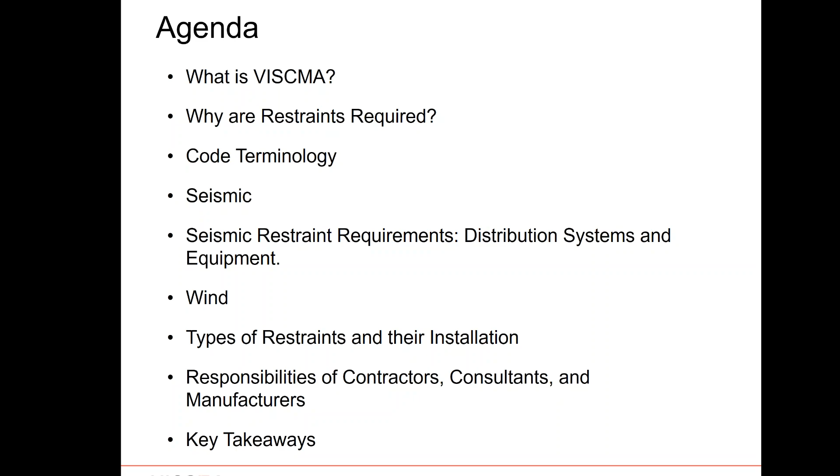We'll talk a little bit about wind, which is one of the forgotten areas where restraints are frequently required. And then we'll look at the type of restraints that are available and their proper installation. Finally, our audience are contractors, consultants, manufacturers, and code officials. So we'll talk a little bit about the different responsibilities of each and end with some key takeaways. What are the important things to remember after the fact?

So VISCMA is a collection of partners and companies to form the Vibration Isolation and Seismic Control Manufacturers Association. We were incorporated in 1999. And we're experts in the field of seismic restraint, wind restraint, vibration isolation, and noise isolation.

Our purpose is to work together as a collective of professionals with a lot of knowledge and a lot of experience and expertise to be able to provide resources, interpretations, and standards, as well as best practices for the design professionals, installing contractors, and code officials in our industry, to be able to maneuver through the different documents that are necessary to understand what needs to be done for a building when it comes to vibration isolation and seismic restraints.

So to kick off our agenda today, we'll take a look at when are these restraints required. We've had a lot of communication with contractors, code officials, and specifying engineers to say, okay, I have a building, sometimes it requires seismic, sometimes it doesn't. Just to start off, we need to be speaking the same language. What are we talking about?

When we talk about restraint, we're talking about the restraints of non-structural components. In our industry, generally, these are mechanical and electrical equipment and distribution systems, usually within the HVAC world. And what we're trying to do is restrain them against forces caused by extreme events, not just earthquakes, but also winds, bomb blasts, and different things that can happen to want to move these pieces of equipment.

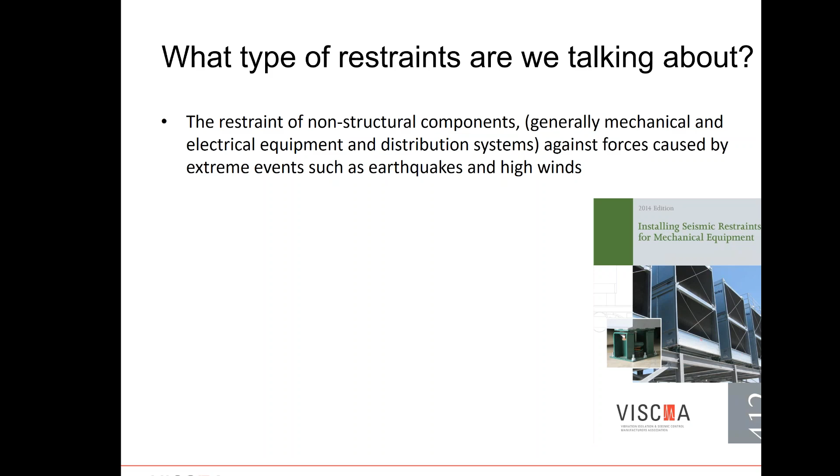The main purpose that we do this is for life safety. In different buildings, you have these pieces of equipment, and you want to make sure that they're operable during and after an event for life safety purposes. You also don't want these heavy pieces of equipment or these heavy systems falling on people, creating bodily harm.

So we have a few different codes and references that we work with. The main is the International Building Code, also known as the IBC, which references the American Society of Civil Engineers, number 7, that is updated, and the number afterwards, 02, 05, 10, is the year that it is updated.

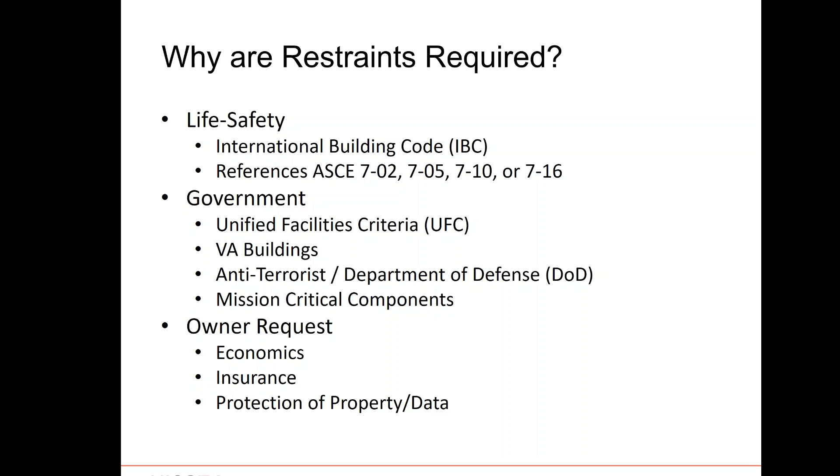You have government reasons, like the UFC, which is the Unified Facilities Criteria that's used for government buildings as well as military buildings, for mission-critical components, for anti-terrorism and Department of Defense. And then the last reason is due to the owner's request. Sometimes for insurance purposes, to be able to get a certain level of insurance, or to be able to protect very important data. A lot of restraints are put into data centers, for example.

Okay, let's talk a little bit about code references. So there's the code, there are standards, and then there are guidelines. An example of the code would be the International Building Code, or IBC. An example of a standard would be the American Society of Civil Engineers, or other standards that are available. And then guidelines or interpretations would be something similar to the VISCMA 412 manual that shows how to correctly install seismic restraints for mechanical components.

Translated, the IBC and the code really signifies the requirements. The standard tells you how to do it and provides you with the formulas necessary that you have to go through. And then these are always up to interpretation. And the guidelines serve as a good interpretation for the people that have to do the work on how it should be done.

A different slice or a different way to look at this is that there's a legal requirement and a non-legal requirement. The legal requirement is the code that becomes part of the building code, and then the standards that are also referenced by that code. The non-legal aspect are the standards that exist that are not referenced in the code itself, or the guidelines of the commentary that come with it. And again, an example for you to see would be the VISCMA 412 manual.

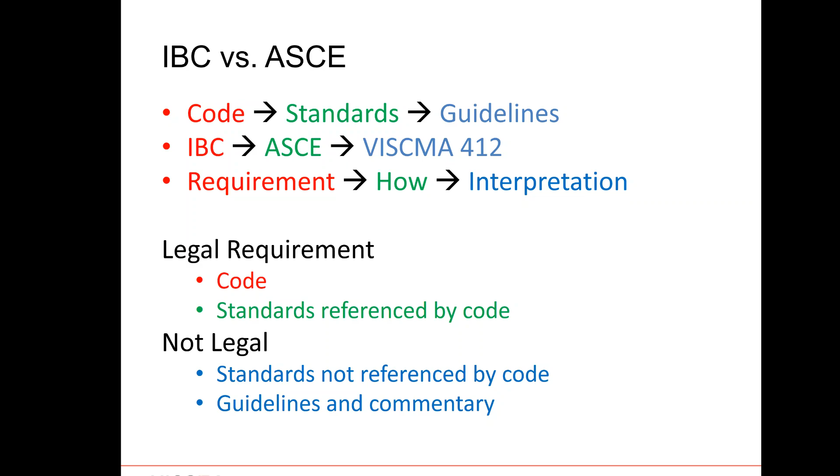Since 2003, the IBC has been referencing the ASCE, American Society of Civil Engineers, for the minimum design loads for seismic and wind. IBC is updated every 3 years. It was the amalgamation of different building codes from across the United States to create the International Building Code. And every 3 years it's updated. It's adopted by different municipalities and jurisdictions at different times. We still have people that are on IBC 2009, and we will have early adopters of IBC 2018 in early days of 2018. And there can be local amendments for each of these municipalities.

The ASCE document is updated as needed. It was updated in 2005, 2010, and 2016. And you can see that each IBC code references an ASCE 7. So in 2018, when your jurisdiction adopts that code, it will reference the newly updated ASCE 7-16. These are the critical documents necessary to have an understanding of what the requirements are for any new construction or retrofit construction in your area.

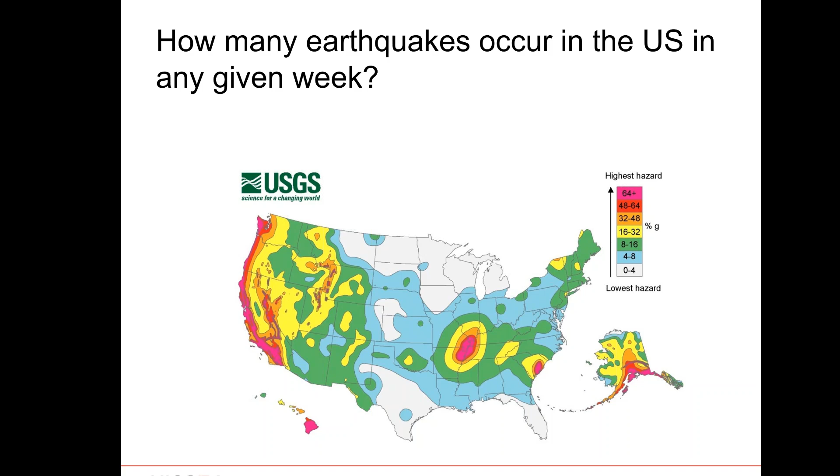Let's talk a little bit about seismic, and we'll start with a little bit of trivia. We've taken some information from the USGS website, and we've taken an average week. So if you were to think to yourself, how many earthquakes occur in the United States in any given week? I'll give you a little bit of time to think about this and come up with an answer. We ask this question when we do these presentations for different influencers. Usually the answer is 5 or 10, or maybe some people would guess that there's 20 or 30 in a given week. The answer for any average week is over 1,200 earthquakes.

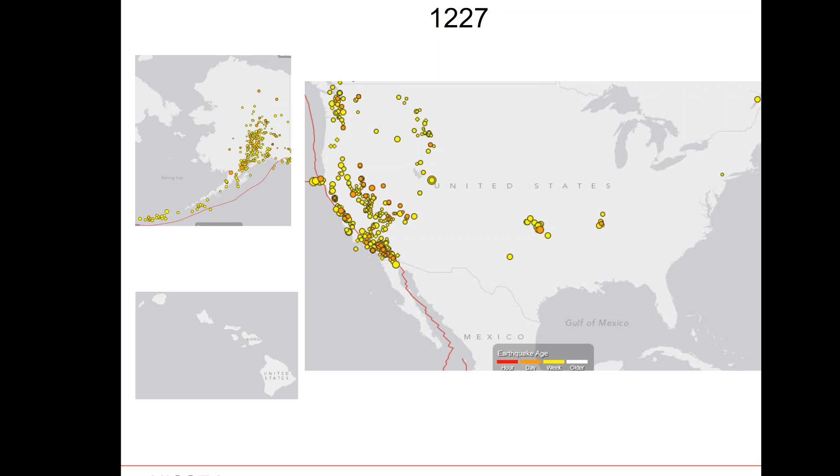And then you can see here on a map of the United States, there's a lot located in Alaska, California, up the West Coast, but it isn't only limited to those areas. You can see that in Montana and Idaho, Oklahoma, Tennessee, and usually in a given week, Hawaii, South and North Carolina would have some seismic activity as well. So this is not just something that applies only to the West Coast.

Obviously, you could see after an extreme event or during an extreme event, it's far more important for the structural integrity for both the building and the non-structural components for higher risk category buildings. This then determines a building importance factor, which is not to be mixed with a component importance factor that we'll speak about in a moment. The site class is a classification of what the building is being built on. What's it sitting on? Bedrock or a swamp? And the seismic forces will act differently on the building and its contents depending on that site class.

Then there are short period response accelerations or ground motions known as SDS and SD1, and these are determined by the location or zip code and are based on history and intensity. A structural engineer of record would take those 4 components plus other factors to determine the most important category that you need to remember from this webinar today, and that is the seismic design category. The seismic design category gives you a classification of a building and advises the consulting and design group of the needs and requirements necessary for restraints of non-structural components within that building.

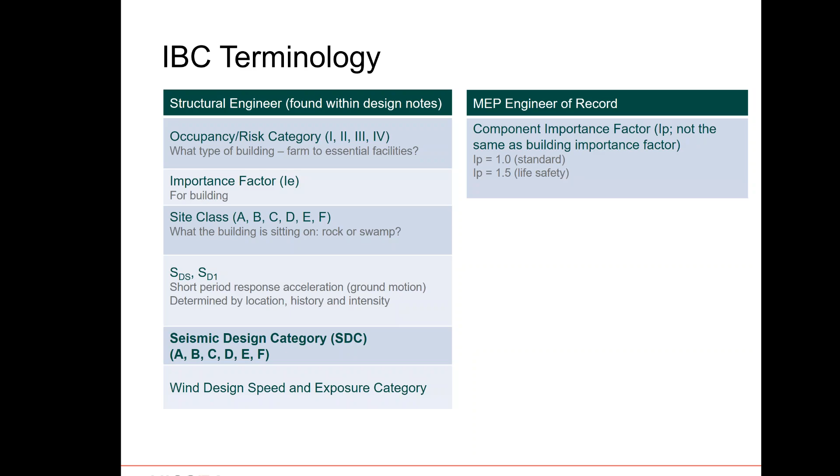It can only have 2 classifications, a 1.0, which is standard, or a 1.5, which is life safety or some other elements that we will cover in one of the coming slides. Basically, the component or system is important to the functioning of the building and life safety, or it's not. And this needs to be done on an individual system or equipment level and shouldn't just be a bland, broad brush across all systems within a building. By doing that, there might be overkill with regards to restraining things that don't need to be restrained.

So when we take a look at the seismic design category that goes from A to F, for buildings that are classified as A or B, there's no seismic design requirements for non-structural components. There are absolutely requirements for the building itself, but when it comes to restraining non-structural components, there's nothing that we need to be worried about. For buildings that have a seismic design category of C, only the systems with an I sub P of 1.5, which we will show you how to determine in a moment, require restraints. And then there are exceptions.

For buildings that are D, E, or F, usually you'll only see C or D. E or F are more of the extreme. But for buildings that are D, E, or F, all of the MEP systems, both 1.0 and 1.5, will require restraints. However, there are some exceptions and some exemptions from this that we will cover.

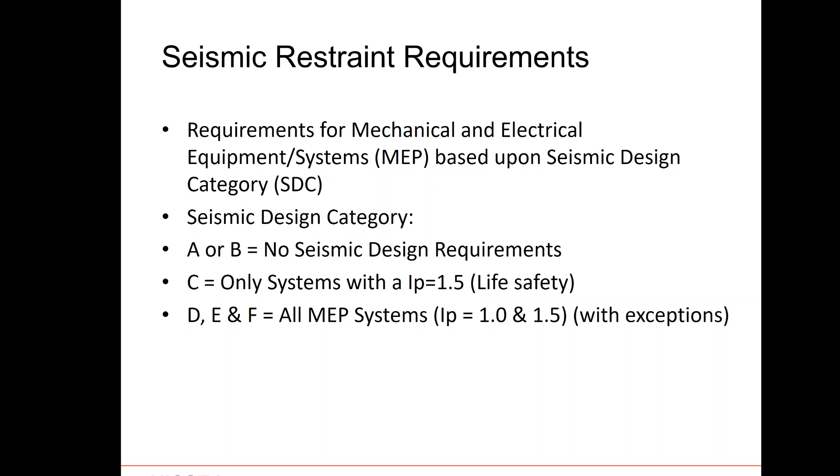Here, we've referenced the ASCE 7-10, since that's the most commonly used version of the ASCE currently, Chapter 13, Section 13.1.3, showing MEP engineers of record how to determine the component importance factor for different pieces of equipment and different systems. And here are the 4 categories that make the I sub P 1.5. By making the I sub P 1.5, there's more likelihood that that piece of equipment will need to be restrained.

So I'll cover a couple of these. The component is required to function for life safety purposes after an earthquake, including fire protection sprinkler systems and egress stairways. Or the component conveys, supports, or otherwise contains toxic or highly toxic or explosive substances. So you can get the picture, and if you reference the ASCE 7-10, Chapter 13, you will find these requirements of where you should classify a component as 1.5 versus 1.0.

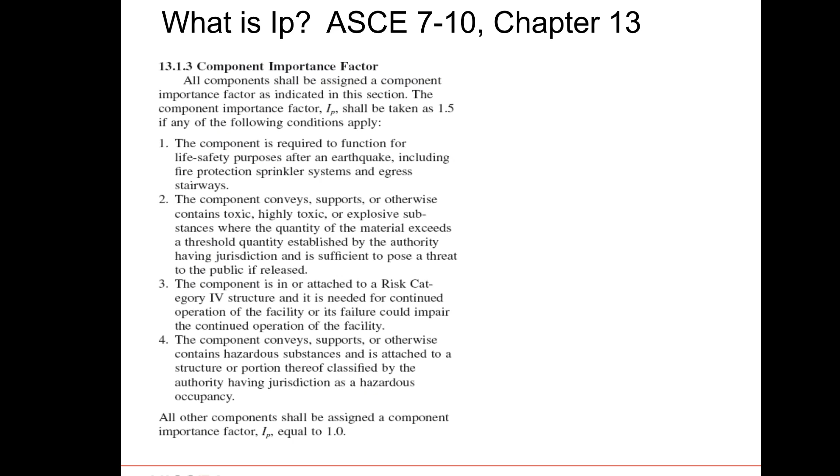Let's take a look at some of the restraint requirements for piping, duct, and equipment. Here you can see a few tables showing the exemptions and the requirements for different seismic design categories for different pipe diameters. You see the pipe diameters on the left going from less than 1 inch to greater than 4 inch. You can see for both 1.0 and 1.5 component importance factors for seismic design categories of A and B, the first column, that they're all exempt.

And then when you move to seismic design category C, you see that all 1.0 is exempt, and the requirement for 1.5 is anything that is 2.5 inches or larger. And now you can see why the role of the MEP is so important. If you classified everything as 1.5, then anything over 2.5 inches would need to be restrained. And you could have very varying scopes of supply for that building.

For SDCs of D, E, and F, you can see that there's still a requirement for 1.0, anything that's 3.5 inches or larger. I'd love for someone to show me some 3.5 inch pipe, never seen one. And then for anything that's 1.25 inches and larger, for 1.5, you'll have a requirement to restrain. Duct is a little more simple. You need to find the equivalent cross-sectional area being less than 6 square feet.

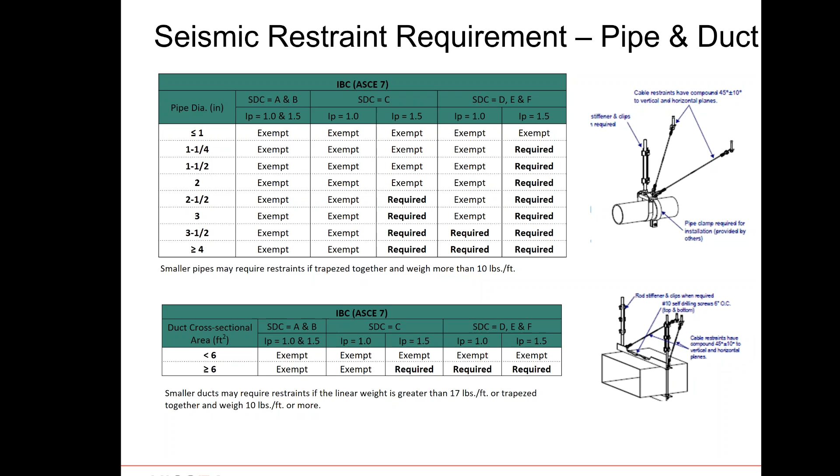Let's take a look at equipment. There's a few different exemptions based on weight for equipment. Basically anything under 20 pounds, which is not too much in the non-structural component world, then you're exempt. If it has less than 20 pounds, it's not considered to have life-threatening aspects. 75 pounds: if it's rigidly connected with no flex and has an operating weight of 75 pounds or less, and you see this with some VAV boxes, then there's an exemption.

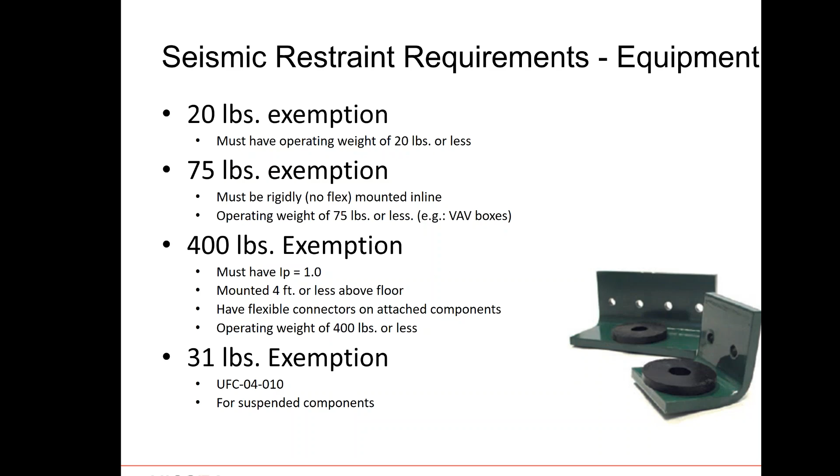And then usually for ground-mounted, floor-mounted equipment, there's a 400-pound rule, but it has a few different factors. This is only for Ips of 1.0. They have to be mounted 4 feet or less above the floor, so usually they're connected down to the ground. They have to have flex connectors on the attached components, and obviously have an operating weight of less than 400 pounds. Now, for a different code, the UFC, there's the 31-pound exception, which basically says anything that's under 31 pounds is exempt.

Coming to an end of my part of the presentation before I pass it off to John Giuliano, we'll quickly just take a look at a couple of types of restraints. We've spoken a lot about requirements, but we haven't taken a look at what these look like. So a restraint is anything that would restrict movement in a certain direction. That's the definition of what a restraint is. And these could be cable restraints that are usually used for distributed systems and suspended equipment, or rigid restraints, which would be brackets with a piece of strut or angle in between that would work as a two-way restraint for distributed systems and suspended equipment.

Steel-housed isolators, so an isolator like you see here in the middle that has a housing around it. The isolator allows small movement for vibration isolation, but under any event, the housing strength will kick in and basically stop the equipment from moving. Snubbers and brackets that maybe are put around a piece of an air handling unit or a piece of equipment to stop it from moving.

And then you have different types of structural stands for ductwork, piping, and tanks, as well as anchors that would just go through the feet of plate and frame heat exchangers, different bolts and screws. This final category has to be ICC approved. You can't simply take any anchor off the shelf and install it. It has to be an ICC approved anchor, bolt, or screw to be put in with the equipment and mounting holes.

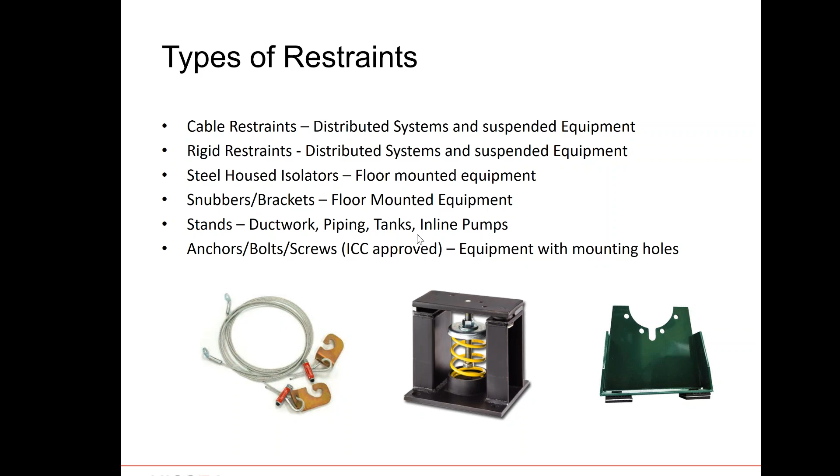So I'll just leave you with one thing with regards to the equipment and the product that you use. It must be included in the submittals and stamped by a professional engineer. For example, you can't just select something, put it on and say, okay, I put a snubber around this air handling unit. The design must be calculated so that an engineer of record can determine that the seismic restraint being used is sufficient to withstand the forces. Since the forces vary from location to location, floor to floor, equipment to equipment, a calculation needs to be done to ensure that the restraint can overcome those forces.

And lastly, the product should be tested as per the industry test method to ensure that the load envelope being provided by the manufacturer is accurate and does what it says it would do. And this is a newly established standard by ASHRAE, and it's standard 171.

Okay, that ends the first part of our webinar. I will be passing off controls to John Giuliano, and he will take it from there.

Okay, thank you, Sammy. Can you hear me, Sammy? Yes, I can. Okay, so presumably everyone else can. Let me just steal this from you. And you guys may be seeing my pull-down menu during this. We were having technical difficulties, so you'll be seeing my pull-down menu, but hopefully nothing else of my screen. And thank you, Sammy. That was a lot of continuous talking, and without feedback it is difficult.

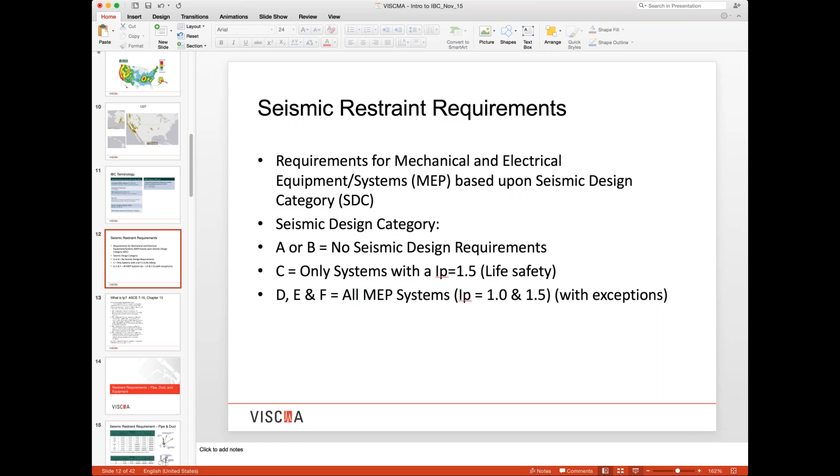And now, I just got somebody saying that they're looking at slide 12, but I'm looking at slide 21. Sammy, you want to speak up and let me know? What do you see? It's moved on to 21 now. It was slide 12 for a while, but now it seems to be on the right slide. You're good to go. Okay, I apologize for that. It was 21 on my screen. All right, we're still having some technical issues.

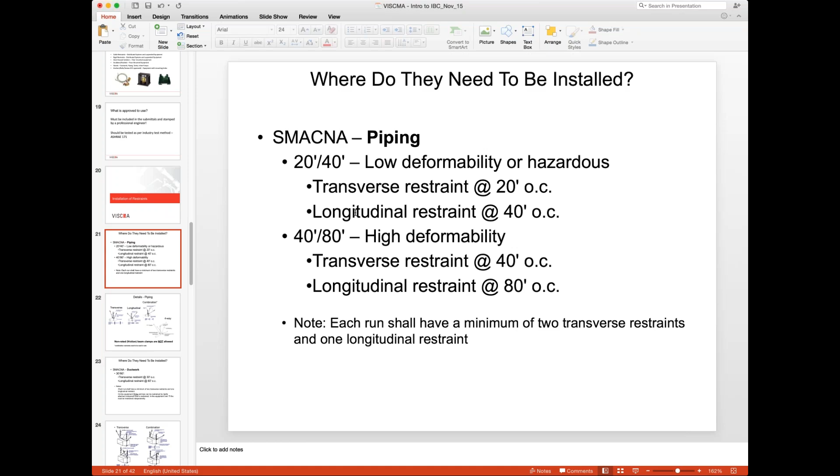And here, from a schematic point of view, are the type of details you'll see on a submittal or on the MEP drawings, and they're broken up fairly simply. A transverse is, just as it says, two cables, two rigid braces, two structurally designed restraint elements perpendicular to the run of the pipe. It's shown in 3D and in plan view, where you put a bar across the piping run calling out a transverse, or sometimes it's called a two-way.

The next one is the longitudinal, which is just a straight line. You can grab either end of the clevis bolt, or you can grab the base of the hanger rod. And what's shown here is also very important: Sammy had on other pictures these rod stiffeners and clips when required.

When you do the math to determine the seismic force being applied, since the seismic force is a shear force, when these cables or rigid braces pull back that pipe in tension, it has a component in the vertical direction which will compress that hanger rod.

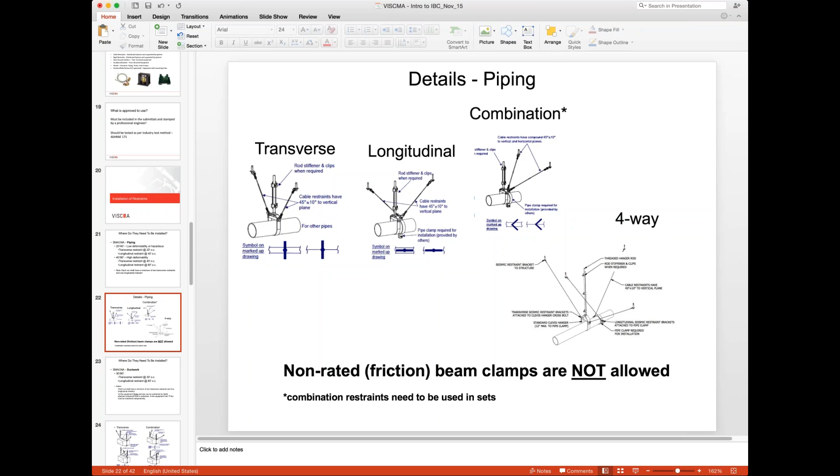Now, did that slide move along, Sammy? If you're still there. Hopefully it has.

Now, on ductwork, we use a different standard. We use a 30-60. All elements of what we had done on the piping are the same. We go through the math, determine the load, determine the required capacity of the brace that we're going to apply. And the same thing, each run requires 2 transverse restraints and 1 longitudinal. And in the code, there are standards as to what defines a run. If it's a typical bend or such, some of it may be small enough where it is not a run.

And then inline equipment, 75 pounds and less, can be restrained when it's rigidly attached to the ductwork. Anything over it has to be independent. The assumption there is for something weighing 75 pounds or less, the standard design and construction of the duct will restrain and support that 75-pound piece of equipment.

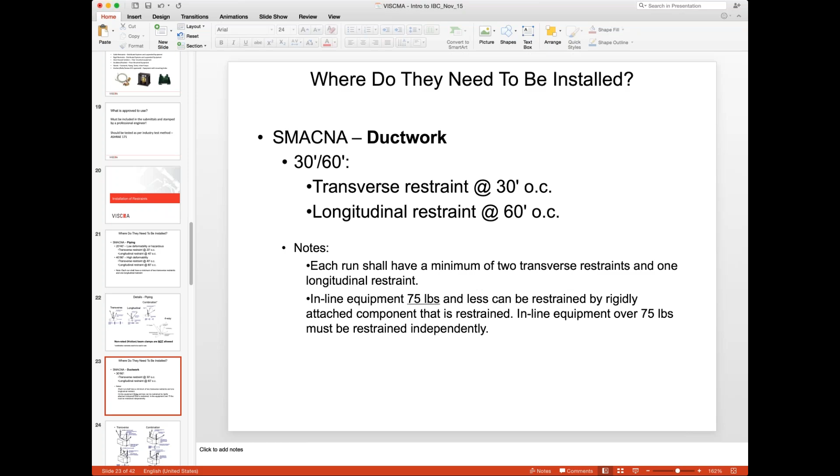And here's the same 4 layouts as for the piping before. And so rather than go individually through them, one thing I do want to point out that's important, a lot of people don't realize, if you look, probably best on the lower 2 drawings, the transverse bracing doesn't technically have to span outboard of the ductwork. They can cross inboard, so they don't run into other pipes, other ductwork. You still run it at the same roughly 45 degrees off the horizontal, and you have a lot easier installation.

So for the contractors out there, you may only see them on the drawing where they splay outboard, but you can go inboard if you have the room. Much less interference. All else has to be equal, the same. The math has to be done right. It still has to have the rod stiffeners, and the anchors, as Sammy said, have some kind of third party. He referenced ICC, which is generally the one out there, but there are other third-party certifiers for anchors. So get the allowables from there when you do the math for that one.

And there's a very important note at the bottom. Non-rated friction beam clamps are not allowed. The code is explicit that you're not allowed to use friction due to gravity as a seismic restraint.

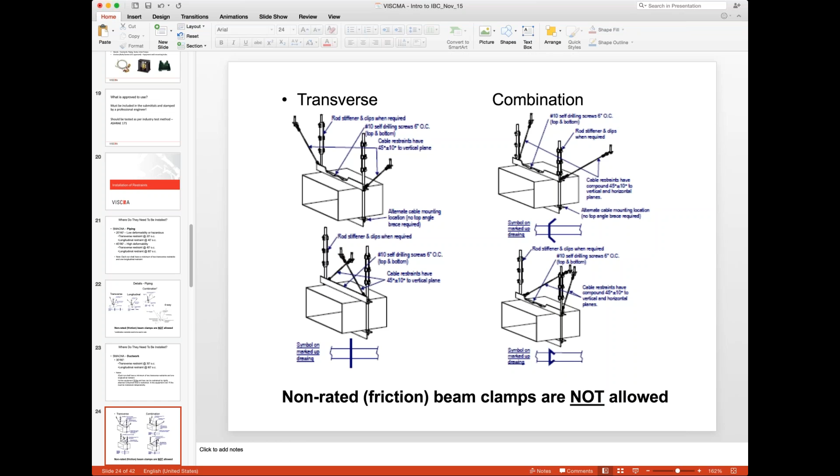So here's that discussion of rod stiffeners I was bringing up. In general, you're going to see rods from 3/8 to 1 1/4. Occasionally you will get higher, but that's the general 90-10 rule you're going to see on your job sites. And that table shows the maximum length before you're going to need a stiffener. And so you see a 1/2-inch rod, anything over 2 feet, it's going to require stiffening, because with any compression load, it's going to buckle. It almost buckles under its own weight when you stand it up vertically.

And then when you have it with an isolator, that sketch shows that you are now technically using that hanger box as part of your compression system to get that compression load back up to the building. And as such, you're going to need to install, and it's typically on all of the manufacturer's submittal drawings, a stop washer with a nut underneath the box, so when you push on the rod, it doesn't just go through the box. And this way you can carry your compression load, and those boxes are typically designed for that, since they're also designed, at least on the tension side, for a large safety factor over their standard spring capacity.

And the notes on that table are also important. A minimum 2 rod stiffener clamps. It's rare, but occasionally you'll see just one piece of angle bolted to the side of that rod; that doesn't shorten the effective length of the rod.

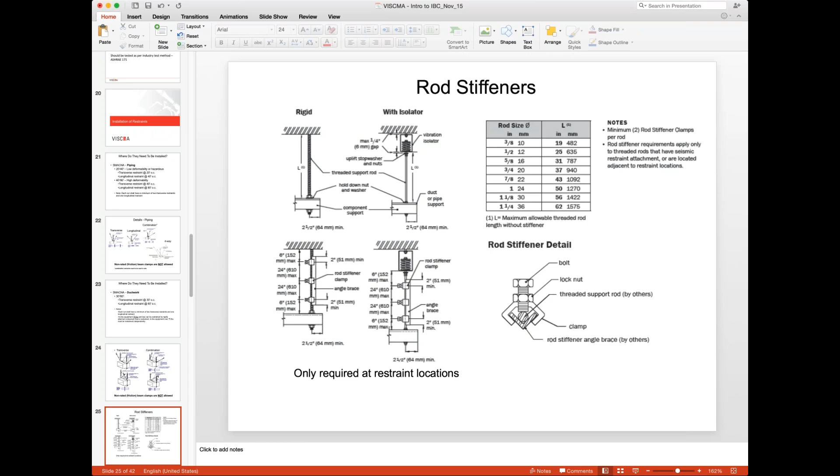Now, where do they need to be installed? They being seismic anchorage and such. Right now we've been talking mainly about overhead suspended equipment, but the same process of going through the calculations, going through the requirements, going through the seismic design category to determine what needs to be anchored. Then now you've determined that this equipment is floor mounted and needs to be anchored. You have to go through the calculation to determine the load on each anchor, and then use the appropriately rated anchors.

And Sammy put together this PowerPoint, so he did all the heavy lifting for us. Thank you, Sammy, again.

And he pointed out 4 of the manufacturers that are typically out there. We know there are others, and this does not say that these are the only ones to be used, but we do know there are rated allowables out there. They've done testing, and most contractors easily have access to these manufacturers. But the math still needs to be done. Someone has to go through the numbers. An engineer has to do his calculations, put a stamp on it, that he followed all the code requirements for amplifying the loads or putting safety factors onto the loads when you're attaching this equipment to concrete.

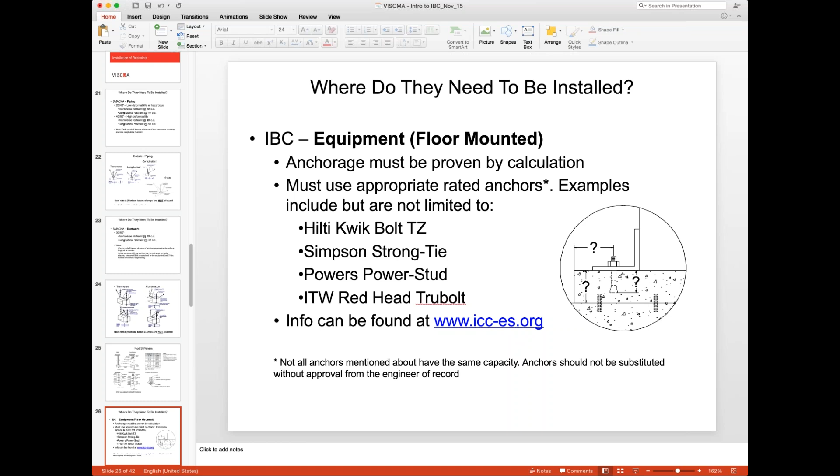Wind restraints. This is a good year for this one. We probably haven't updated this. We've got to double check, but as Sammy said, there was some trivia. If you ask yourself what was the costliest natural disaster in U.S. history, it was Hurricane Katrina. Obviously more than just wind damage, but there was $108 billion in damage, and we know 1,833 people, way too many, were killed because of it.

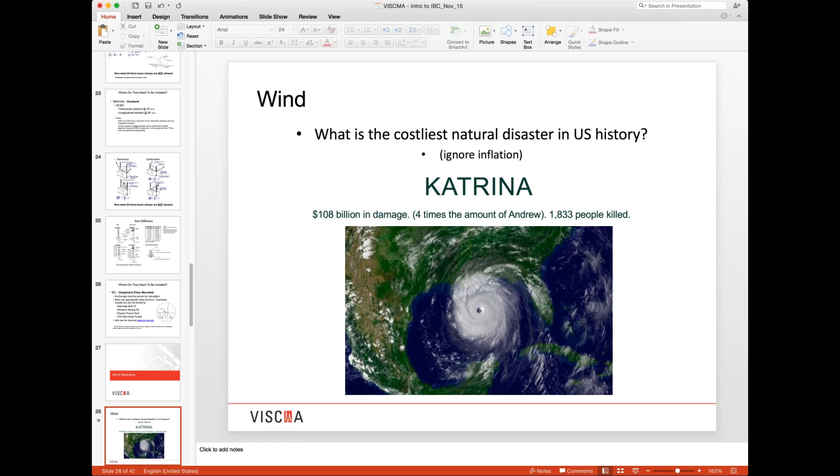And this year we know between Texas and Puerto Rico and other locations, there's been wind damage all over the place. And one of the issues we know is the attachments, which we'll get to. But other than seismic, ASCE 7 puts out maps for wind. And as luck would have it in our country, most of the regions that are high in wind are low in seismic. So regardless of where you are, you're going to have some kind of requirement that's going to require restraints, analysis, and such to keep mechanical equipment attached to the building structure.

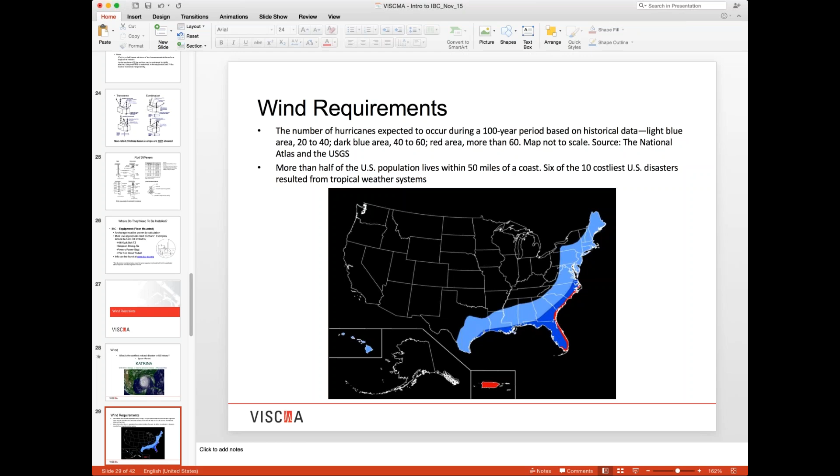The map here is just showing more of an occurrence of hurricanes throughout 100-year map history. We all know where they come in, and you see Puerto Rico is red. They're still out of power. Their infrastructure and the equipment was not all done properly, so now they're paying the bill for bad designs throughout the years, which hopefully with the IBC and the training, all gets fixed eventually. So IBC, they have maps within the code, which they have changed through the years, and that's why they're broken out in 2006, 2009.

There was one way to calculate the loads based upon wind speeds. There was a wind factor of 1.6 in the load combinations in these building codes. So it's very important when you're doing the analysis for wind that you're looking at the right map relative to the right code that you're using.

Because now when we move on to the 2012 map, it looks like some of the wind loads may have gone down for the higher buildings, but they really haven't. It's more that the amplification went from 1.6 to 1.0. So actually, no, the wind loads went up. Apologize for that, it was the other way around. We went from a 1.6 to a 1.0 amplification, but the wind speeds went up. So effectively, the wind pressures, in general, roughly remained the same.

Though if you notice on the 2012 maps, there's multiple maps, and it's based upon, if you can see my mouse over here, risk category now. And Sammy mentioned that earlier, that that's an important piece of information we need from the engineer as to the type of building. And on the S001, it should be there. And as you go up in risk category, for obvious reasons, the design wind speed goes up.

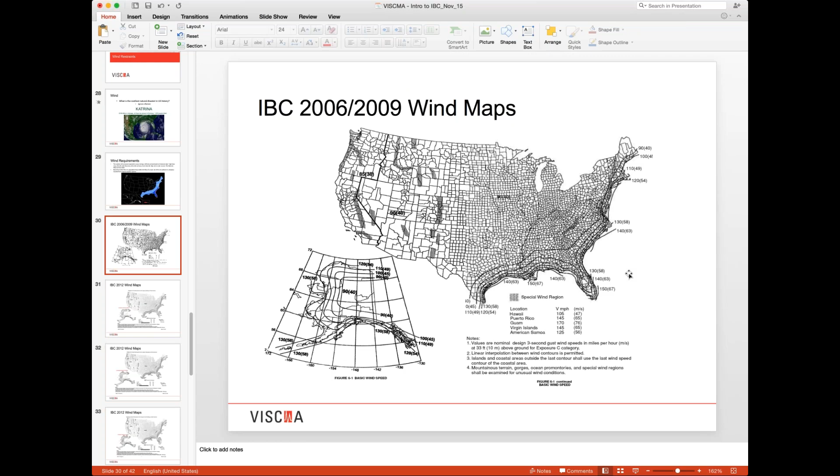And so if you're using a 2012 map, you need to use the 2012 load combination factor to get the correct pressures. If you're using the 2006, 2009, the wind speeds are a little bit lower, but you have a higher amplification. So you need to be very sure of your risk category and the code you're using.

Now, in general, through the years, the wind code equation stayed roughly the same. In ASCE 7-05, it was in chapter 6. In 7-10 and 7-16, it moved to other chapters. And for mechanical equipment, which we're discussing, you'll find all of the details in chapter 29 for ASCE 7-10 and 7-16. But effectively, from your wind speed, you have to determine a pressure. There's gust effect and force coefficient factors that need to be put in.

Though in general, for the equipment we're dealing with, we're not designing buildings. We're talking about mechanical equipment, rooftop equipment, rooftop structures. What's highlighted in yellow is there's a 1.9 factor. And in the newer codes, which generally everybody's been using, that combination becomes a 1.9. And then that's multiplied by the frontal area of the equipment, which is the area of the equipment normal to the wind, which will be receiving the load.

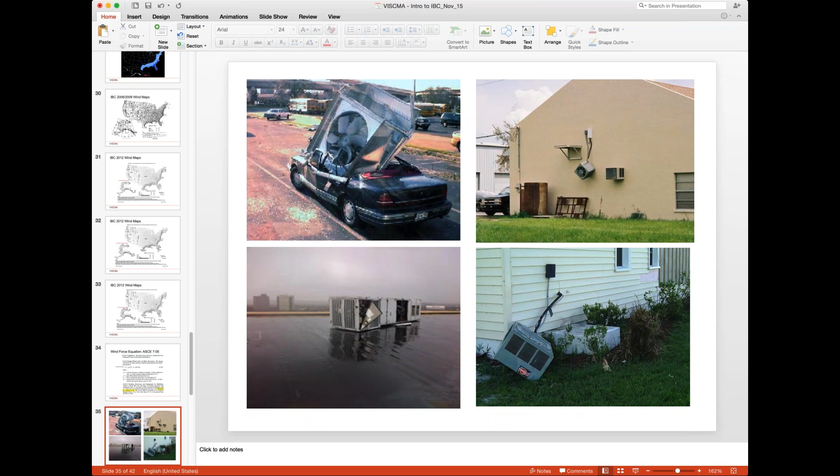Now, here are some examples of what happens when it's done wrong. I don't remember where some of these are from, but I do know the one on the lower left was from Sandy. The other bad designs, I don't know exactly which hurricane or windstorms they came from, but needless to say, they were done wrong. The equipment itself wasn't attached properly to the building structure. Very similar to the suspended equipment and the floor-mounted equipment, roof-mounted equipment needs to be attached to the building structure using the equations calculated here to determine the type of restraint or anchorage to the building.

Now we have a section here on responsibilities. Sammy mentioned some of the more important ones earlier on. The most important, at least from our aspect, is the Ip of the equipment, which comes from the MEP. And as he mentioned, and I'm sure somebody will ask, there's only two values of Ip available. It has a short menu. You get 1.0 or 1.5. And that determines exemptions or whether or not the equipment needs to be anchored properly.

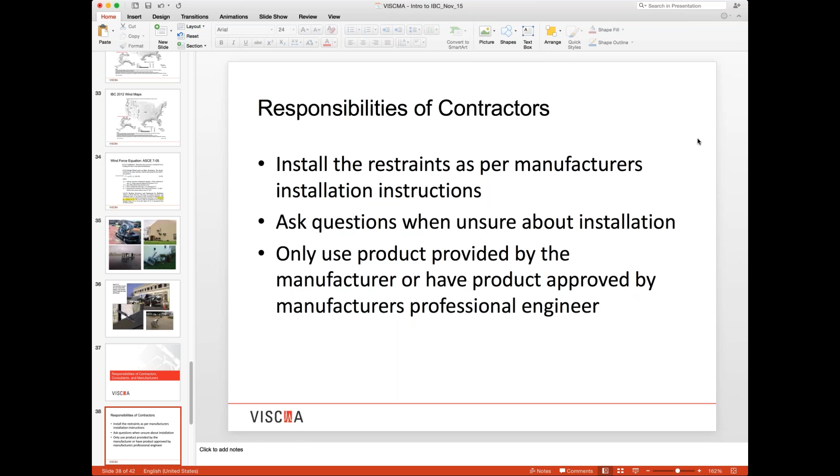The consultants, they get in obviously on the job a lot earlier, and it's their responsibility to write a project-specific specification, and they have to reference explicitly which code is the design code for that particular building. And every state varies, as we know, whether it was submittal date for permit or approval date or whatever it may be. So as an MEP installing contractor or someone supplying equipment, we don't know when all the paperwork started on the project. So the consultant has to put it somewhere clearly, which is the building code of the basis of design.

They need to create the schedule or specify the IP, as we were talking about. Without that, as engineers, we have to make worst case assumptions. A standard of care has to be provided. We have to assume worst case if we're not told otherwise. So it gets very expensive for the building owner if that IP is not properly specified or if it's not specified at all.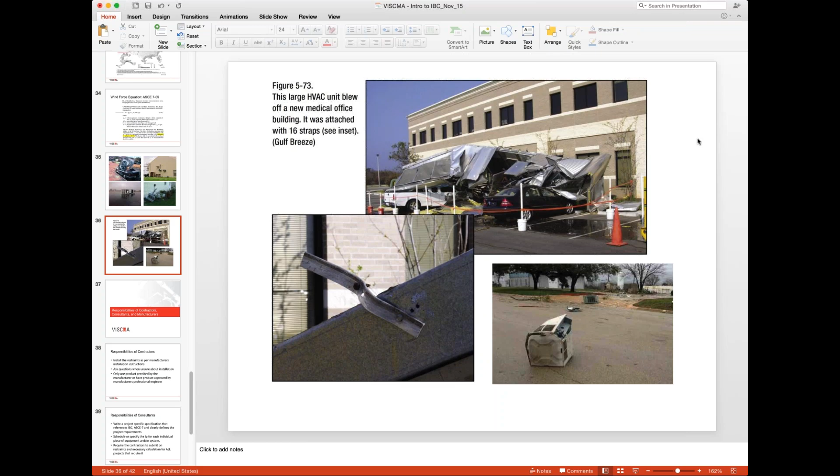And the consultant also has to require the contractor to submit the restraints and calculations for all projects that require it for approval, so that someone else has reviewed it, that the building engineer, whoever, structural engineer, or their consultants have looked at it and also have been at least alerted of the loads that this equipment is going to apply to their structure. Many times, especially we see some of these pictures, big pieces of equipment, very often the building engineer was unaware of the level of load that his building will see from that wind. So by submitting all of that information back up the food chain, everyone will be aware of the loads that will be applied to that building.

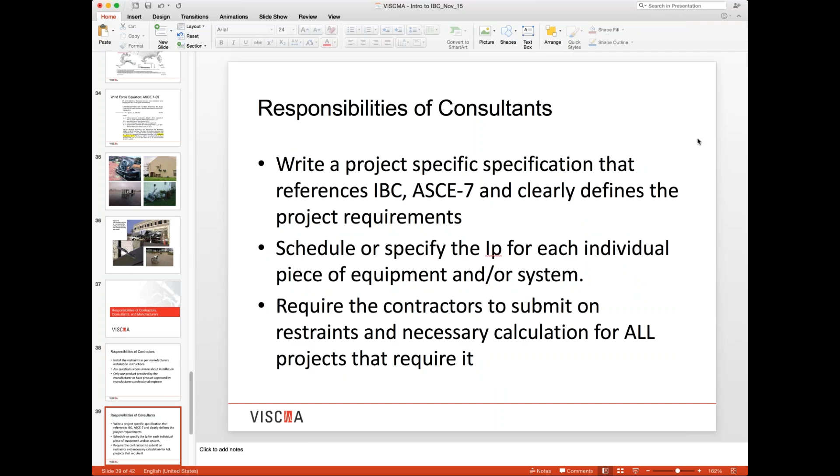Now the manufacturers, this actually falls under two types of manufacturers. The manufacturer of the equipment may not always be the manufacturer of the restraint, but we all have the same responsibility. The products need to be tested in some way, shape, or form to ensure and prove that the rated loads that are being put out there have some basis. The old days of just throwing a calculation and saying this is good for 1,000 pounds, engineers today are expecting more and demand more. And so the responsibility is to test your product to make sure it's compliant. Also, if it's the equipment in IP, in critical facilities and essential facilities, the building code now requires the equipment to be tested anyway to show functionality after the event.

We, the manufacturers, and as VISCMA, we are manufacturers, we are required to follow the code for all calculations. And the codes are very explicitly spelled out on how to do the math, and we have to follow them explicitly and put our PE stamp on those calculations. Then we are also required to give instructions to make them as clear as possible for the contractor so he doesn't make a mistake. And like I say, occasionally we will leave something out, and it's incumbent upon him to question us and make sure he's got it right, and we have provided as much detail as possible so it's not installed wrong.

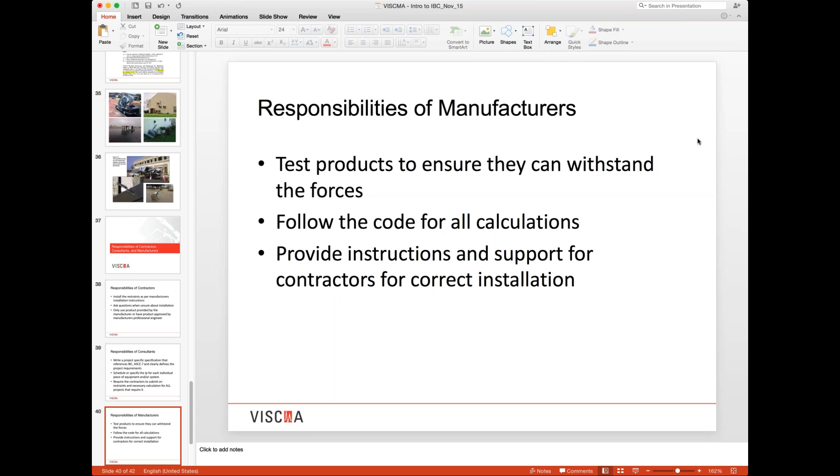Now, as Sammy mentioned, VISCMA, we've been around since 1999. I'm actually a founding member, been around it since 1999. We do provide a lot of information in terms of questions and answers. There's a FAQ page. We've produced all kinds of calculation documents, installation documents, and other documents, opinion papers relative to the code, and it all can be found at viscma.com. And as you see, that's the website.